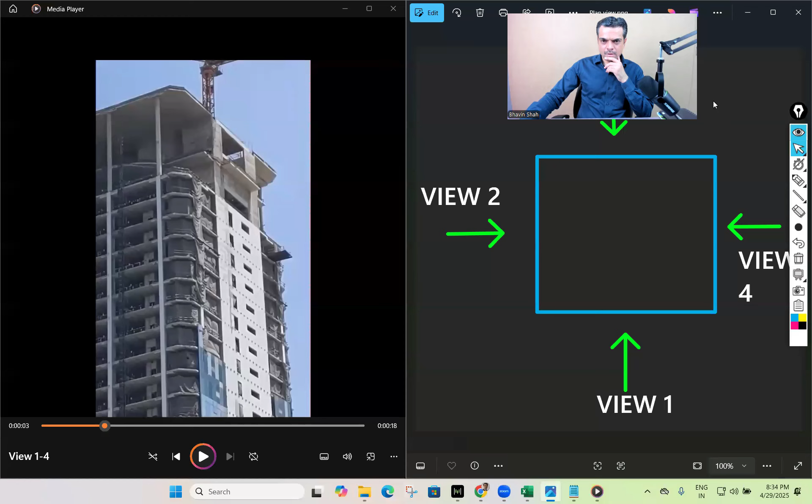Let me just open it here. Okay, this is what I have said as... so this is the view number... if I just put it here.

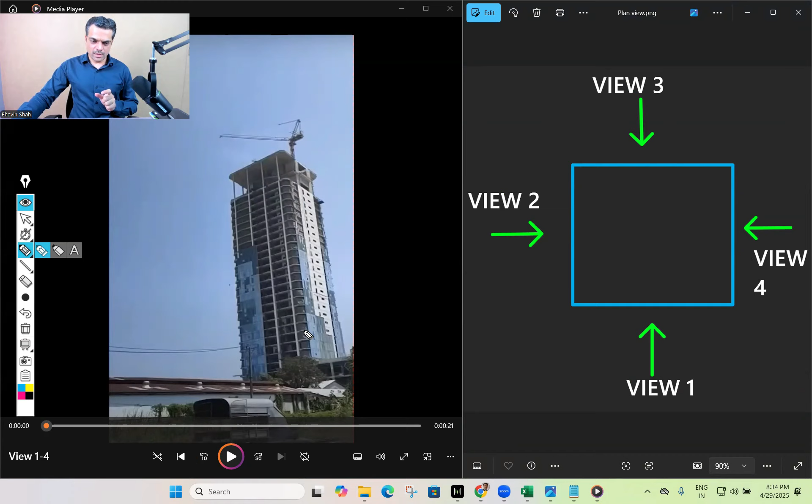Okay, so first of all this view I've considered as view 1-4. So we are looking from this direction. This is side number 1 and this is side number 4. So we are looking from this view - that is view number one and view number four, as I have said here.

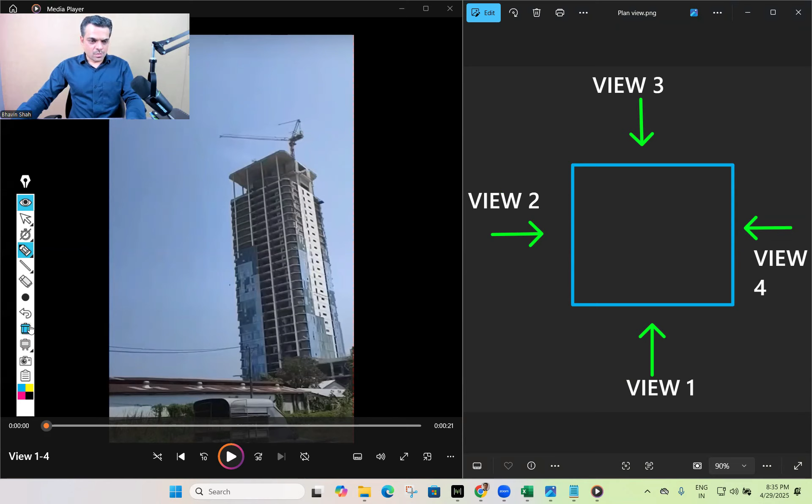So right now we'll just put up this quick clip in fast motion, or in real time motion, and of course in the next part of this session we'll run this clip in slow motion. Okay, so now it's not running - okay, here it is. So this is the view number one and four.

And from that side, here we can see some failure, and then suddenly it collapses. Of course we'll try to analyze this clip in very slow motion in the next part. So this is one of the view number one and four.

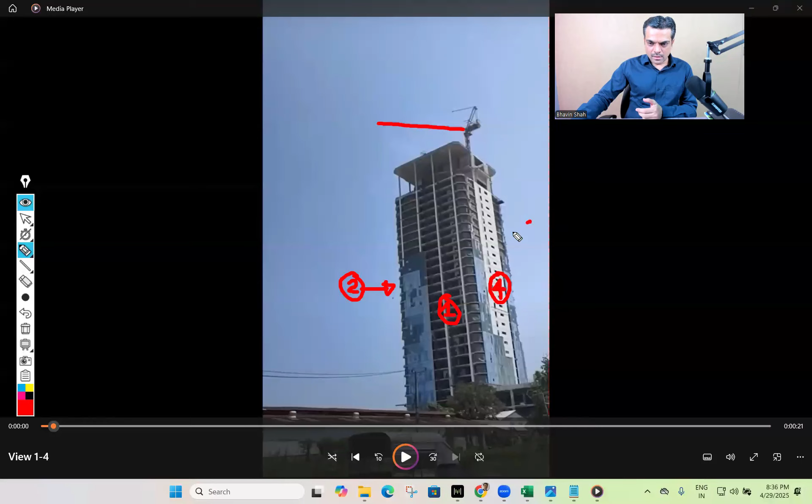Second view - let's see what is view number two. In this view, what we could see - of course the view I have defined based on my understanding, based on the limited information we have. One piece of information we have from this clip is that there is a position of the crane here, which we can see at the top. So this is side number one, as we said, this is side number four, and opposite to this is our side number two, and in the back side, this is side number three. So let's try to see view number two.

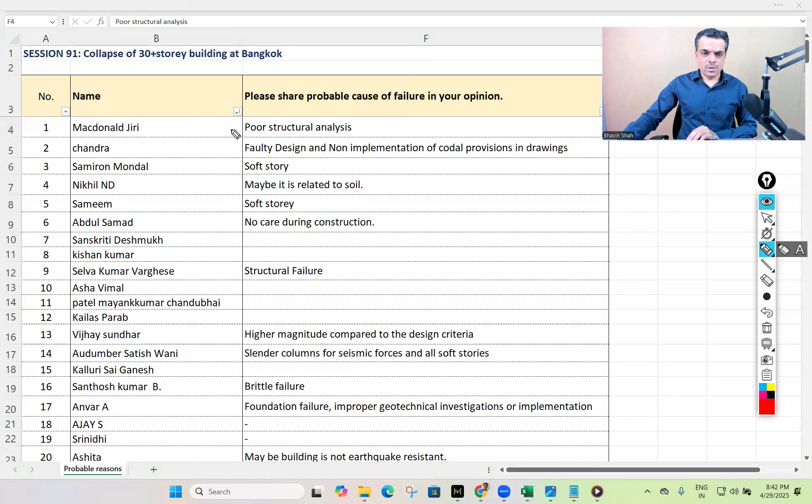Okay, great. So Macdonald is saying poor structural analysis. Chandra is saying faulty design and non-implementation of the codal provisions. Samiron is saying soft story, right? Nikhil is saying it is maybe related to soil. Sameem is saying soft story. So in fact we have received responses from different parts of India, as well as from outside India. Abdul is saying no care during construction, meaning fault in the construction.

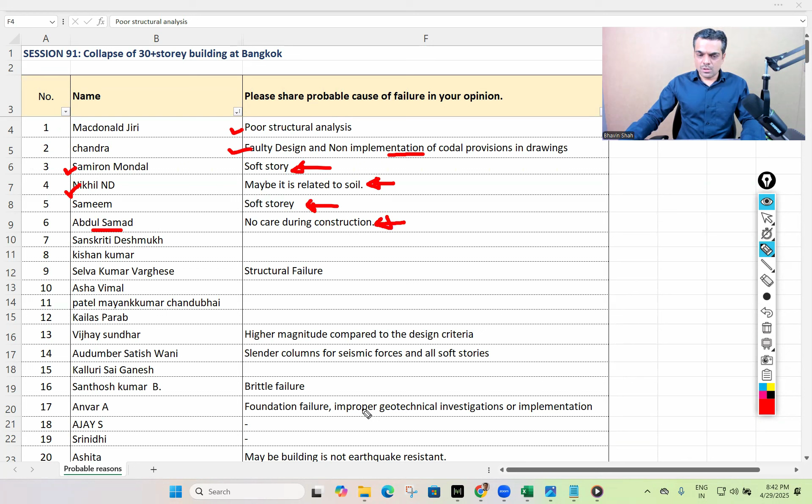Structural failure. Selva and Vijay are saying the actual load was of higher magnitude compared to the design criteria. So whatever load the structure was designed for, the actual force was higher than that.

This point is mentioned by Audumber Satish Wani: slender columns for seismic forces and soft stories. When we look at the footage, we can see that the columns are relatively slender. So that is one of the reasons.

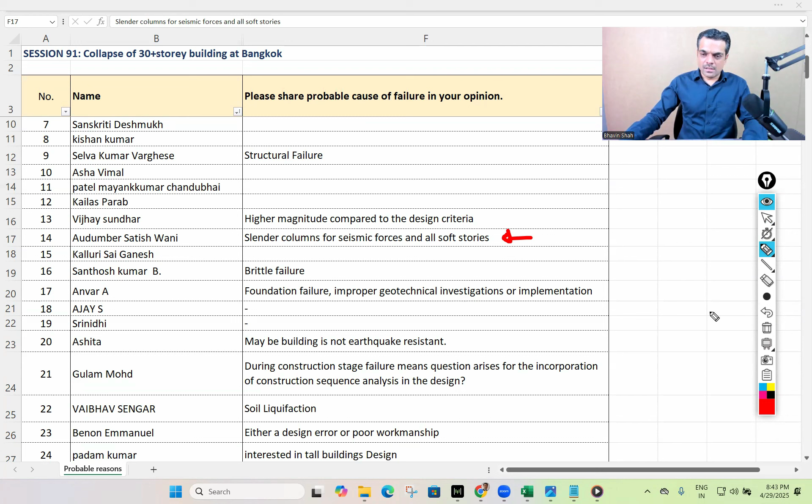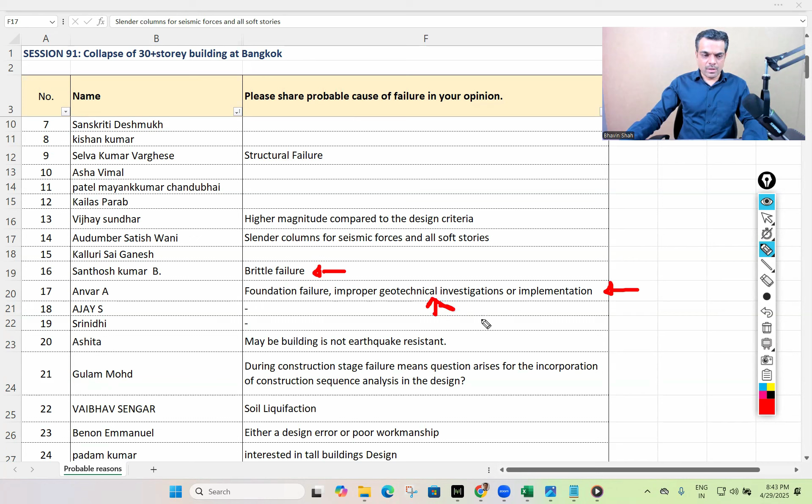Santhosh Kumar is saying it's a brittle failure. Anvar is saying foundation failure due to improper geotechnical investigation or implementation. Ashita is saying maybe the building is not earthquake resistant.

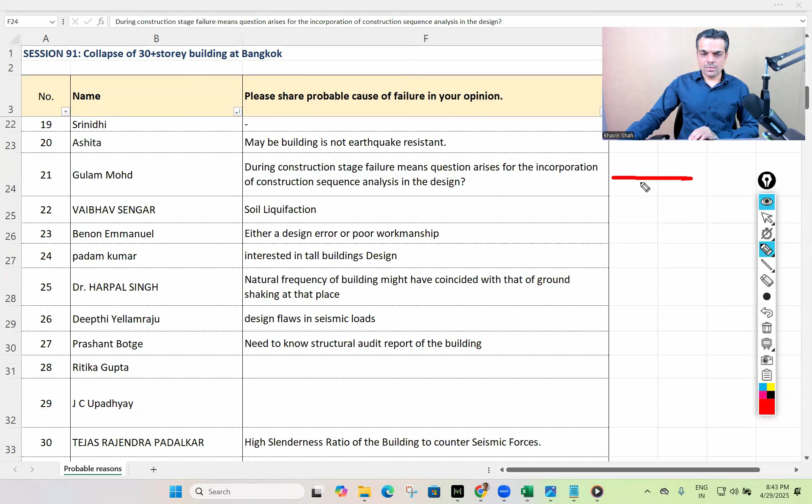Gulam is saying that failure during the construction stage raises the question of incorporating construction sequence analysis in the design. That's very important - when a building is under construction, and the structure is not yet complete, whether it is able to sustain the earthquake load.

Soil liquefaction is one of the reasons said by Vaibhav. Benon is saying either a design error or poor workmanship. Padam Kumar says he's interested in tall building design.

Dr. Harpal Singh is saying the natural frequency of the building might have coincided with the ground shaking at that place. So when the natural frequency or natural time period of the building and the earthquake shaking motion are generally nearby, the amplitude will increase, and that will increase the forces on the structure. So that's one of the reasons.

Design flaws in seismic loads. There's a need to know the structural audit report of the building.

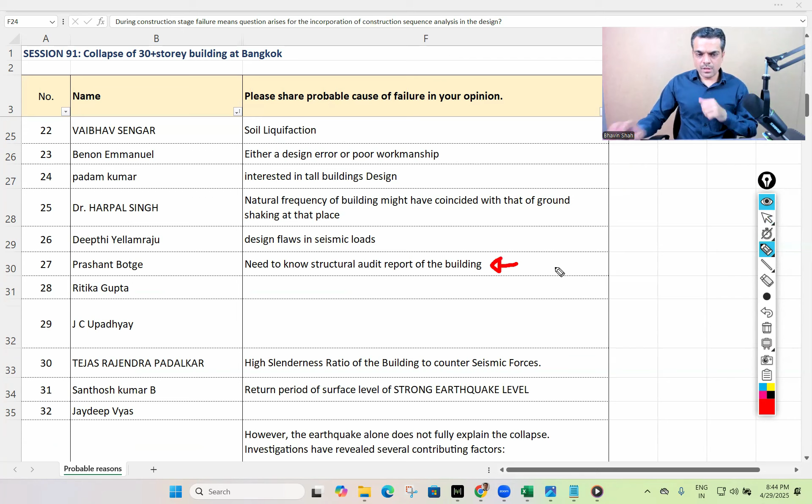Yes, of course, that's a very interesting thing. The detailed forensic investigation is under progress, and everyone is looking towards that report - what will be the finding?

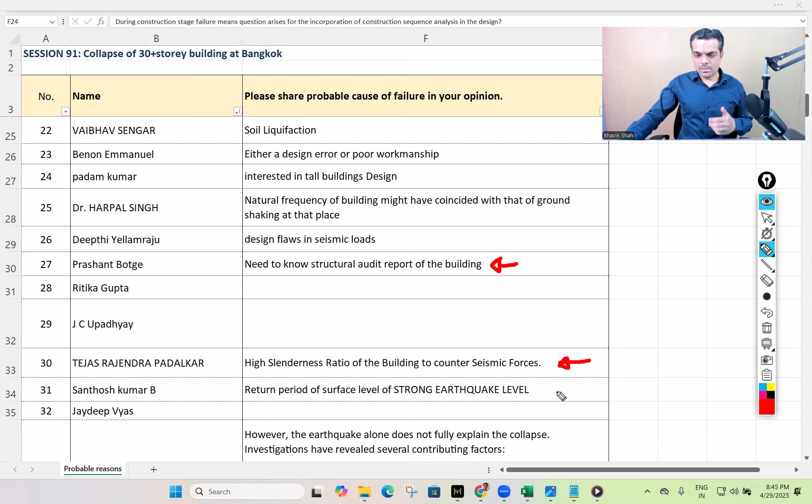Tejas is saying high slenderness ratio of the building to counter seismic forces. Santhosh Kumar is saying return period of the surface level strong earthquake level.

Sunil Varma is saying the earthquake does not fully explain the collapse. Investigations have revealed several contributing factors: structural deficiency, substandard materials, regulatory oversight failures.

So when we look at the reason for collapse of the structure, what happens is there is usually a single reason which might have triggered the collapse, and then there will be other reasons or other deficiencies of the structure which will contribute towards the collapse.

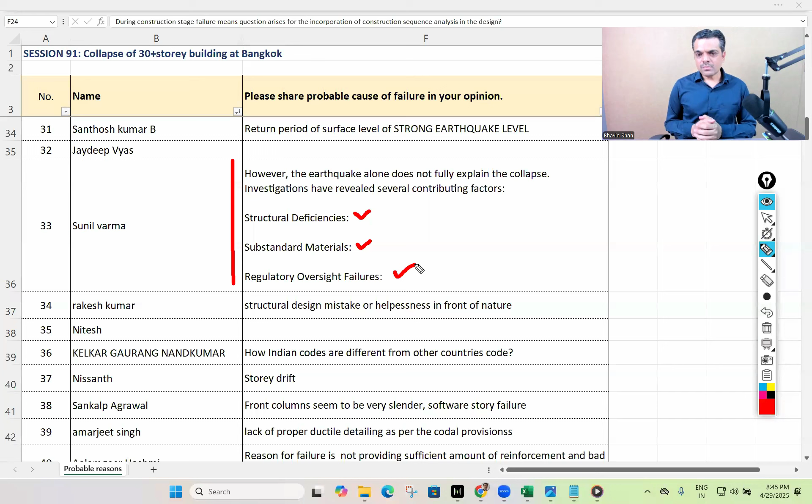Amarjeet Singh says lack of proper ductile detailing as per the codal provisions. Reason for failure is not providing sufficient reinforcement and maybe bad quality of concrete work. Anees is saying mechanical couplers and soft story. So we can see soft story is repeating at a number of places.

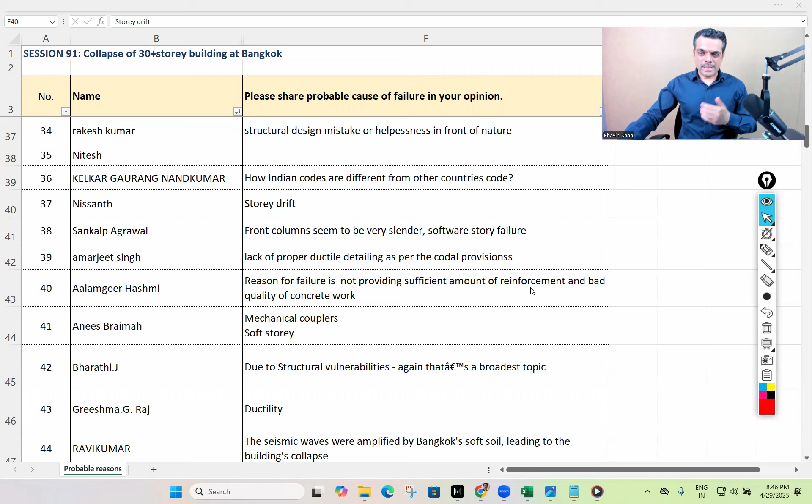Bharathi is saying it's due to structural vulnerabilities. Greeshma is saying maybe improper or inadequate ductility. Ravi Kumar is saying the seismic waves were amplified by Bangkok's soft soil, leading to the building's collapse.

So we can see 3-4 participants have said the collapse is triggered because of, or rather contributed to, the geotechnical failure, we can say.

Soft story and punching shear, that's said by Chandra Bhan. Pratik is saying most likely the slender columns and the soft story.

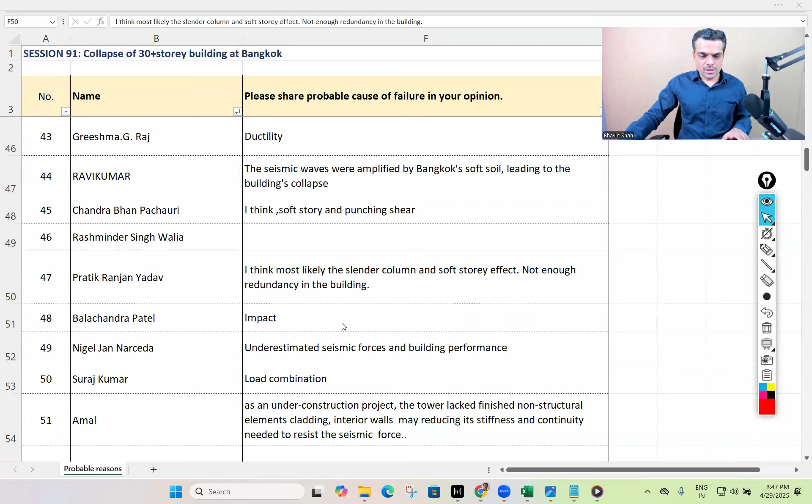Nigel is saying underestimated seismic force. Amal is saying as an under-construction project, the tower lacked finished non-structural elements like cladding and interior walls, reducing its stiffness and continuity needed to resist the seismic force.

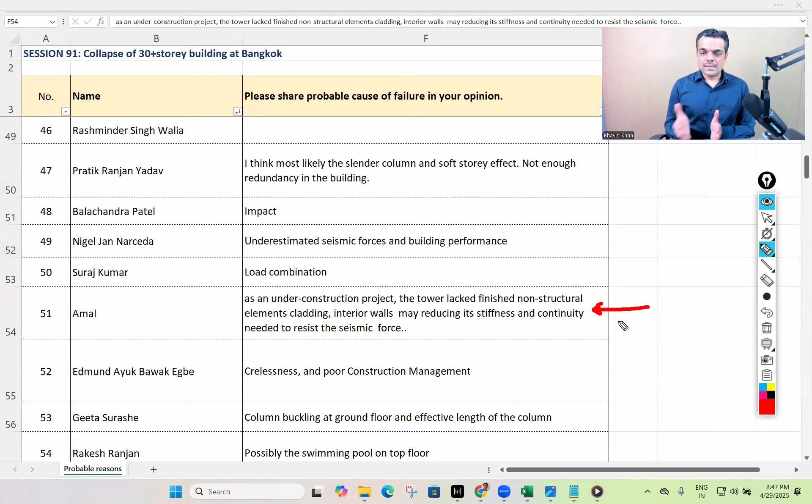Of course, we do not consider all non-structural elements for the purpose of resisting earthquake load, but definitely we can say non-structural elements also contribute towards the stiffness of the structure. So certain parts of the structural system might not have been completed in totality - that may be one reason, apart from the non-structural elements.

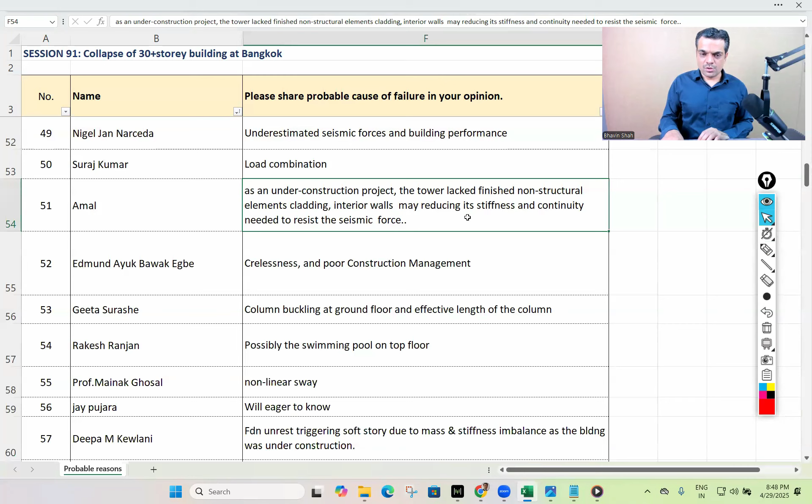Poor construction management, said by Edmund. Geeta is saying column buckling at the ground floor. We'll look into all these reasons once we get into the slow motion mode.

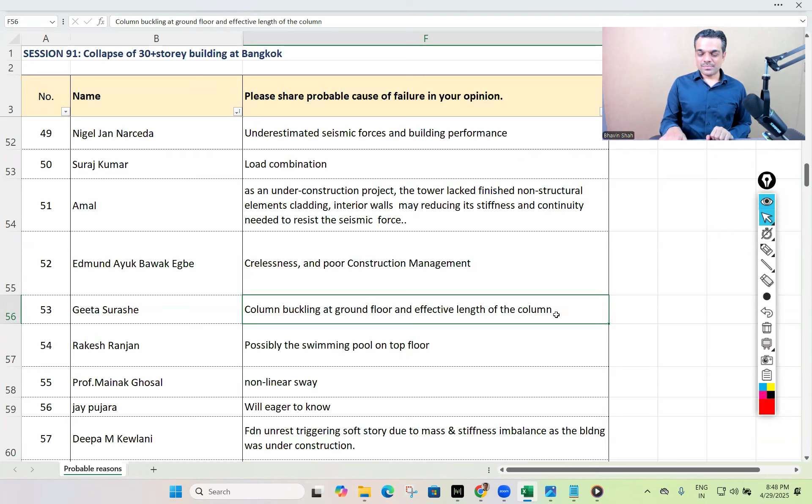Rakesh is saying possibly a swimming pool on the top floor. This was under construction. On a few other buildings, there was a swimming pool where we could see the splashing of water, but on this building, as per my information, I think there was no swimming pool because it was under construction.

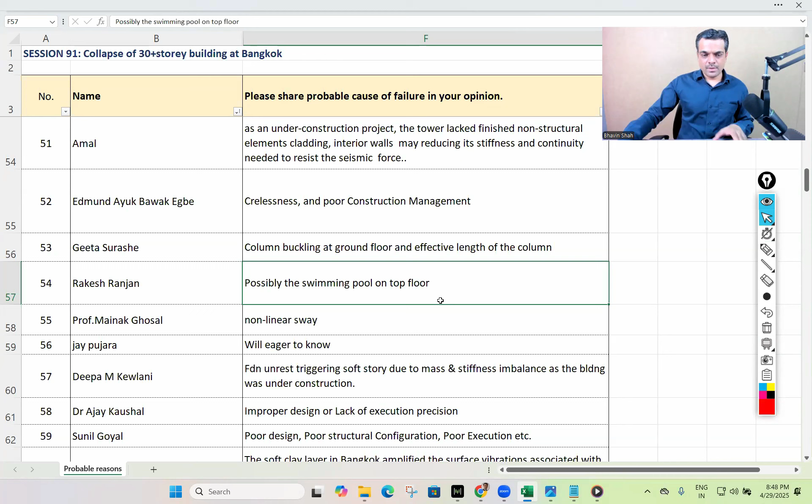Nonlinear sway, by Professor Mainak Ghosal. Jay is saying he's eager to learn this. Deepa is saying foundation.

Unrest triggered soft story due to mass and stiffness imbalance as the building was under construction. Dr. Ajay is saying improper design or lack of execution precision. Sunil Goyal is saying poor design, poor structural configuration, and poor execution, etc.

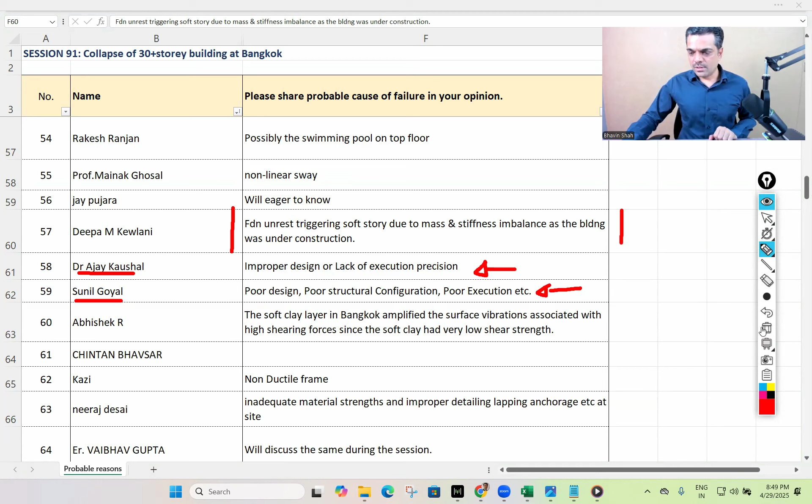Abhishek is saying that the soft clay layer in Bangkok amplified the surface vibrations associated with the high shearing forces, since the soft clay had a very low shear strength. So again, it contributed to soil failure.

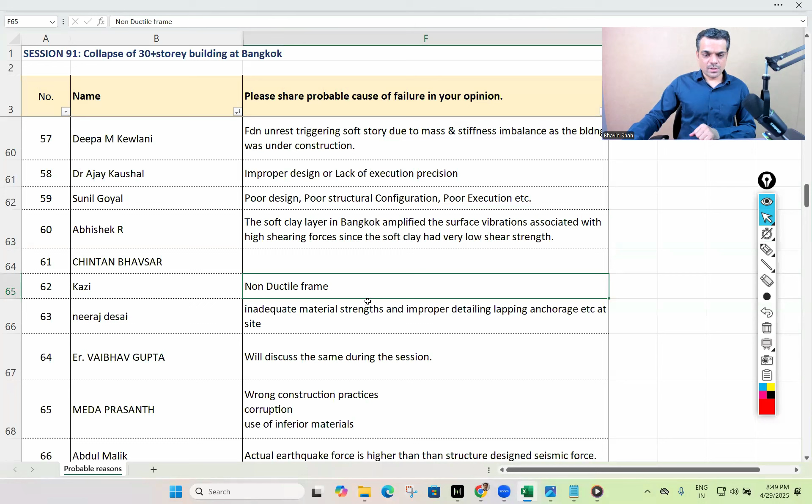Kazi says non-ductile frame. Neeraj is saying inadequate material strength, improper detailing, lapping, anchorage - so ductile versus non-ductile detailing. Meda is saying wrong construction practices. Abdul Malik is saying that the actual earthquake force may be higher than the design earthquake force.

Prasad is saying that collapse of some of the very weak members leads to entire collapse in the form of progressive failures.

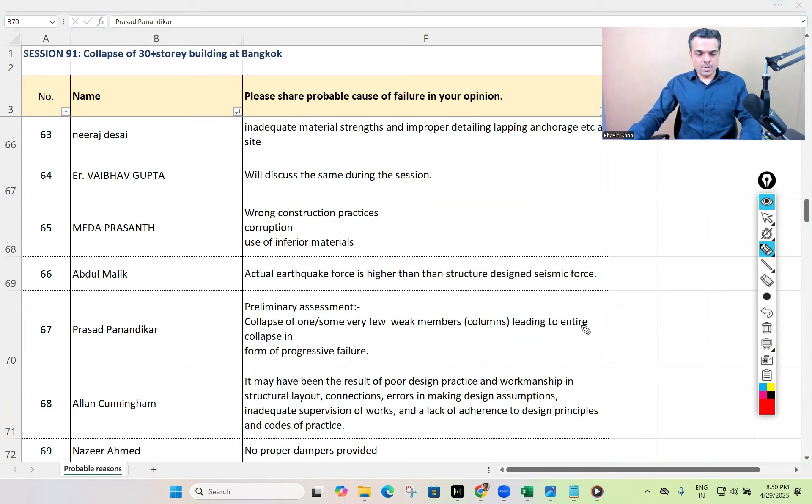Allan is saying that it may have been the result of poor practice, workmanship in structural layout connections, error in making design assumptions, inadequate supervision of work, and a lack of adherence to the design principles and codes of practice.

So that's what we were just discussing, that there may be multiple reasons contributing to the failure of the structure. In fact, I was involved in the forensic investigation of a few projects. We had to find out which is the trigger point that actually triggered the collapse, and then there will be multiple factors contributing towards the complete collapse or failure of the structure.

Nazeer is saying no dampers were provided.

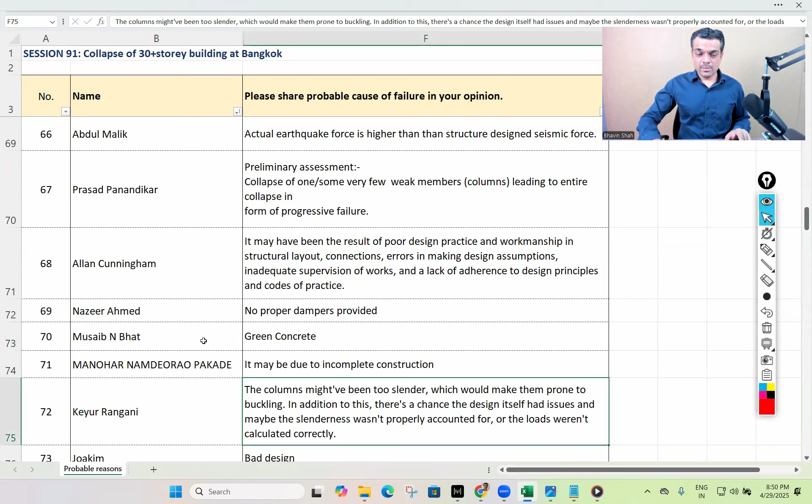Musaib is saying green concrete - that means the concrete might not have achieved its full strength, that's what I understand. It may be due to incomplete construction, Manohar says. So this all we have touched upon.

Keyur is saying that the column might have been too slender, which would make them prone to buckling. In addition, there's a chance the design itself had issues, and maybe the slenderness wasn't properly accounted for, or the loads weren't calculated correctly.

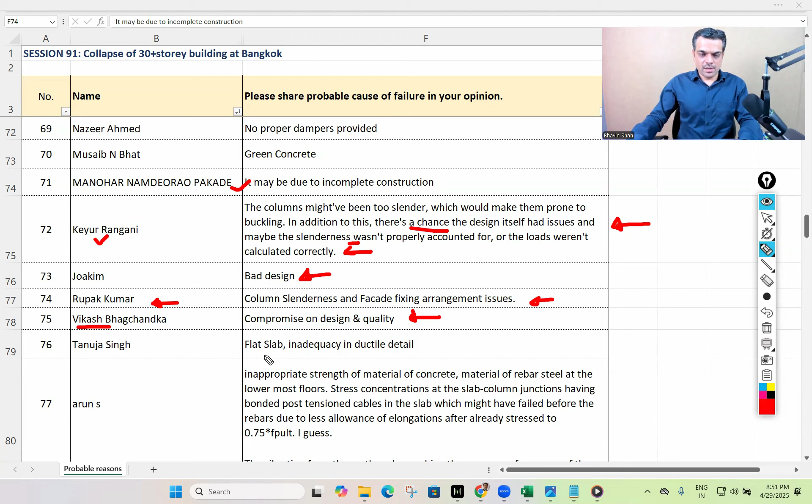Joakim says it's a design fault. Rupak Kumar is saying column slenderness, facade fixing arrangement issues - so this is something new. Vikash is saying compromise on design and quality. Tanuja is saying flat slab, inadequacy in ductile detailing.

Arun has made a very interesting point here: it may be inappropriate strength of material of concrete or rebar steel at the lowermost floors, stress concentrations at the slab-column junctions having bonded post-tension cables in the slab, which might have failed before the rebars due to less allowance of elongation after being already stressed to 0.75 times fpult. So that's the case, right?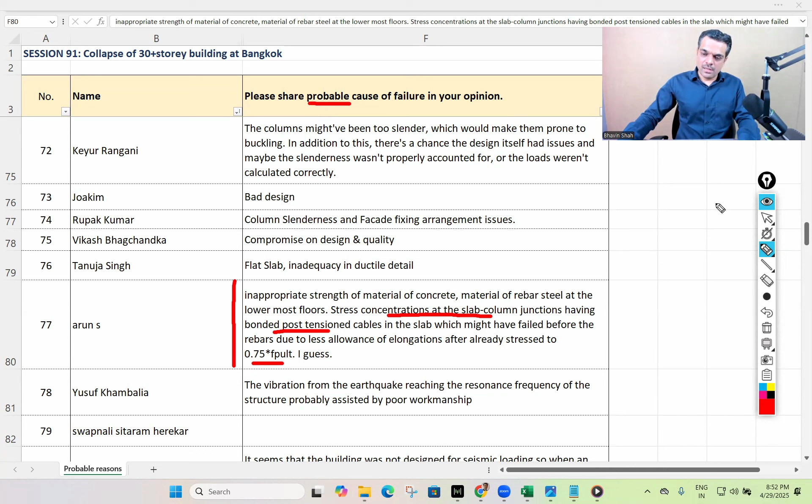In fact, whatever reasons we are putting right now here, these are all guesswork. It's just probable failure causes that we're writing. It's not perfect - everyone is making a guess right now.

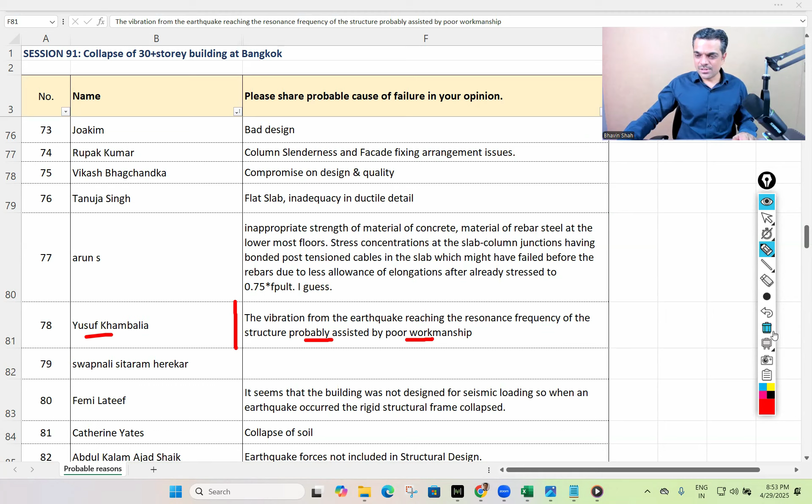Okay, Yusuf is saying that the vibration of the earthquake reaching the resonance frequency of the structure, probably assisted by poor workmanship. So the natural time period and the average time period of the ground motion were both nearby, that's what he's trying to say, and then the poor workmanship assisted this failure of the structure.

Femi is saying it seems that the building was not designed for seismic loading, so when the earthquake occurred, the rigid structure frame collapsed. So it was a kind of rigid failure, right? We could not say the big building was completely swaying like this - it's a rigid failure. Catherine says it's a collapse of soil.

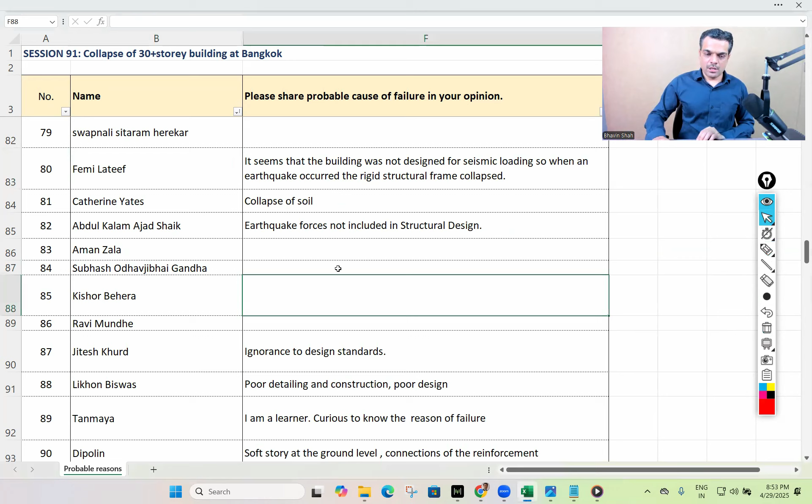Abdul Kalam is saying that earthquake forces might not have been considered in the structural design. Ignorance of design standards, Jitesh says. Likhon says poor detailing and construction, poor design.

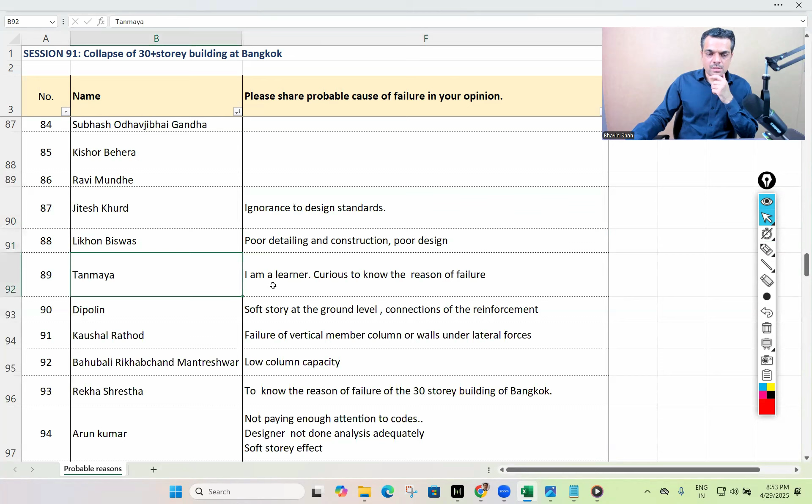Tanmaya says wants to learn - that's good. Dipolin says soft story at the ground level, and connections of the reinforcement. Kaushal says failure of vertical member columns or walls under the lateral loads.

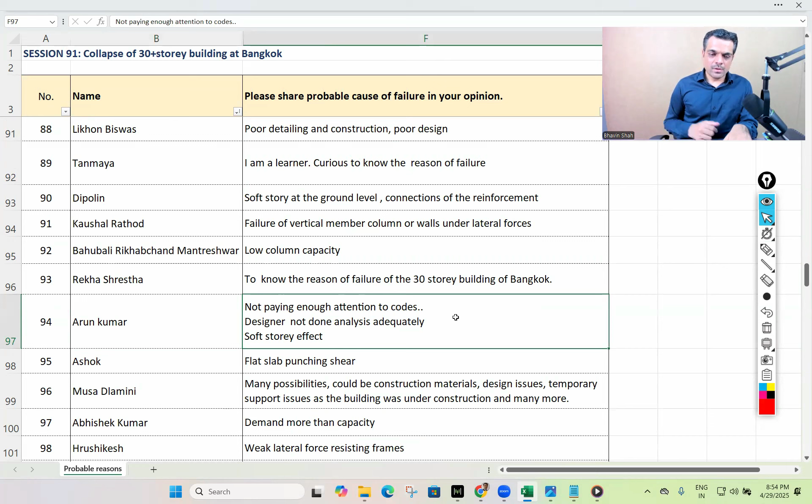Bahubali is saying low column capacity. Rekha Shrestha says she wants to know the reason. Arun Kumar says not paying enough attention to codes, the designer not doing analysis adequately, and the soft story effect.

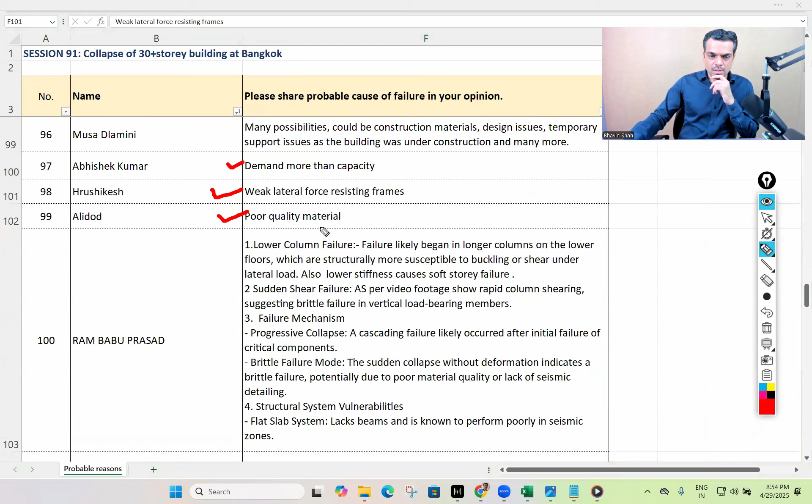Demand more than capacity, Abhishek says. Hrushikesh says weak lateral force resisting frames. Alidod says poor quality material. Rambabu Prasad makes multiple points here.

Okay, so first of all, there is a lower column failure. We'll try to analyze everything with slow motion videos after this. It says failure likely began in the longer columns on the lower floors, which are structurally more susceptible to buckling or shear under lateral load, and also lower stiffness causes soft story failure.

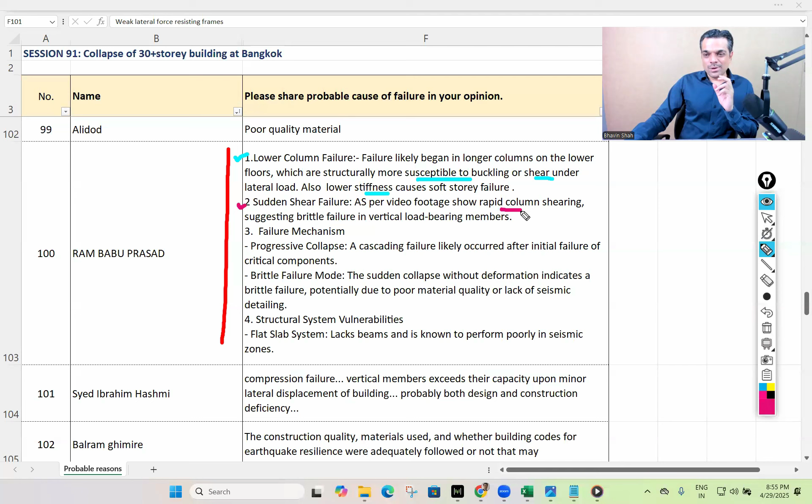Then there is a sudden shear failure. As per the video footage, it shows rapid column shearing. We'll show this, you must have seen it, but we'll try to see it again. And there are some interesting things I've collated which we'll discuss once we finish this file.

So column shearing is, of course, quite evident in the video footage, suggesting a brittle failure in the vertical load-bearing members. And finally, there is a failure mechanism - progressive collapse. A cascading failure likely occurred after initial failure of critical components. Brittle failure mode is a sudden collapse without warning. And structural system vulnerability - there is a flat slab system used, so lack of beams, and it is known that flat slab systems generally perform poorly in earthquake events.

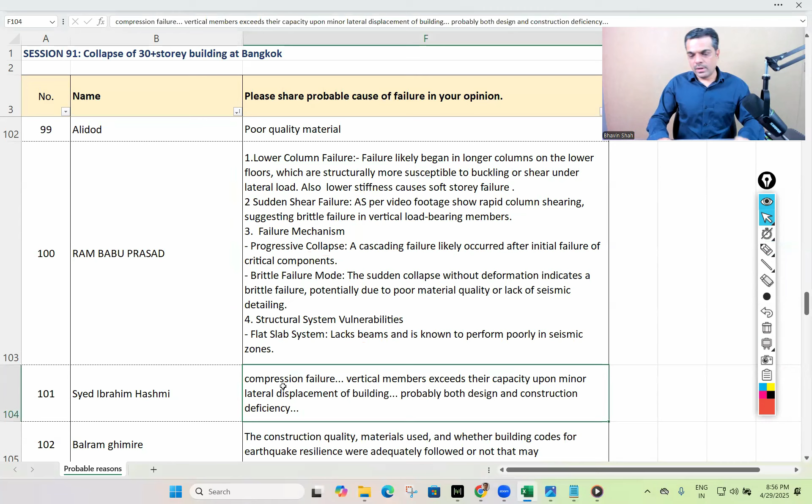Okay, Syed has said compression failure, vertical member exceeds capacity, so it's a column failure. Balram says the construction quality and materials used, whether building codes were adequately followed or not, that could be the reason. As Guru Kiran says, soft story - maybe strong beam weak column was not considered, so basically ductile detailing was not done.

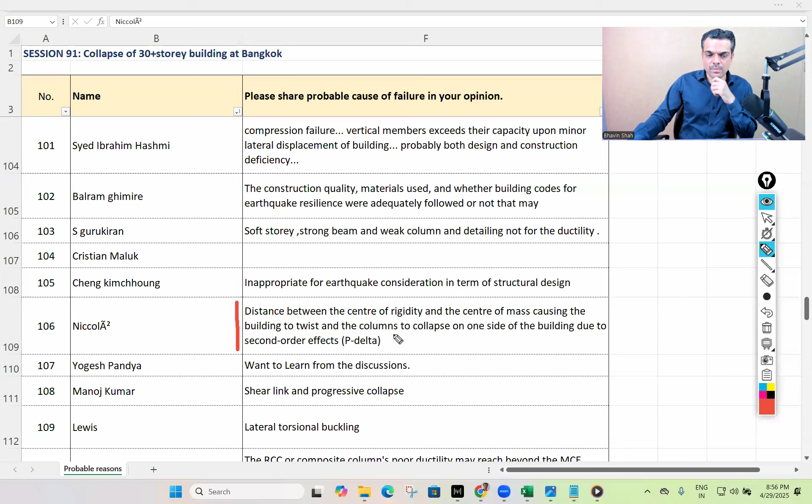That's the point made here, along with soft story. Inappropriate earthquake consideration in terms of structural design - that's what Cheng is saying. Nicola is saying the distance between the center of rigidity and center of mass caused the building to twist, and the columns to collapse on one side of the building due to second order effects.

Very interesting thing - it's said the whole building twisted. So maybe we can say the first mode is the torsional mode. During the seismic event, the building twisted, and that triggered the collapse on one side of the building due to second order effects, right?

Yogesh Pandya says okay, wants to learn - great, that's great. Manoj Kumar says shear link and progressive collapse.

Okay, Lewis is saying lateral torsional buckling. I think he's also pointing to the same torsional mode, probably.

Suresh Kumar is saying that the RCC or composite columns, poor ductility, may reach beyond the maximum considered earthquake level, and unfortunately no other buildings had this impact. Yeah, that's right - so it's only this building which had this catastrophic impact, or we can say it collapsed completely.

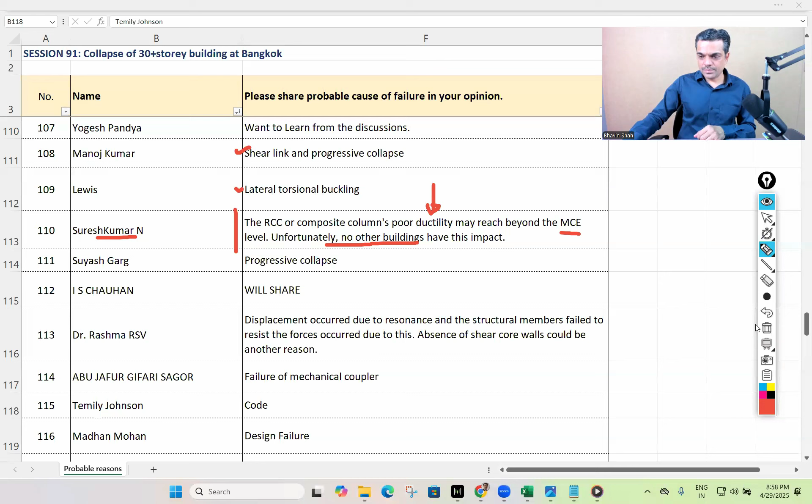Okay, Suyash Garg saying progressive collapse. Yes, Chauhan can share the details if he is online.

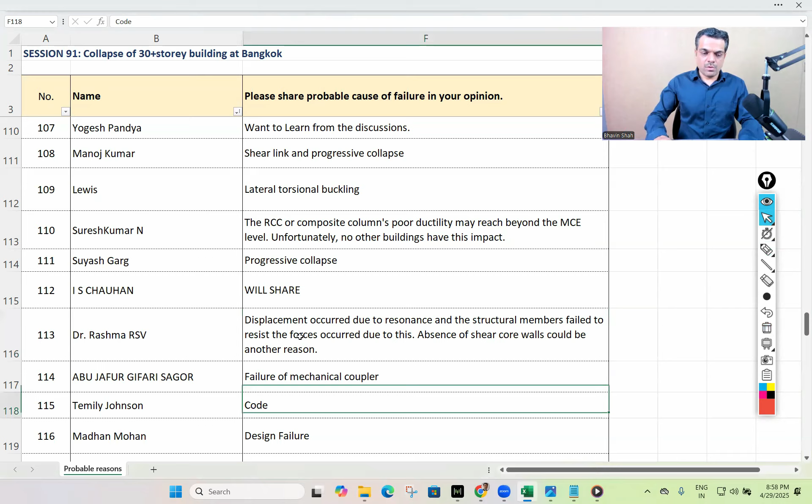Dr. Rashma says displacement occurred due to resonance and the structural members failed to resist the forces occurred due to this, and absence of shear core walls could be another reason. Right, okay, so there is one more reason coming up, which is failure of mechanical coupler.

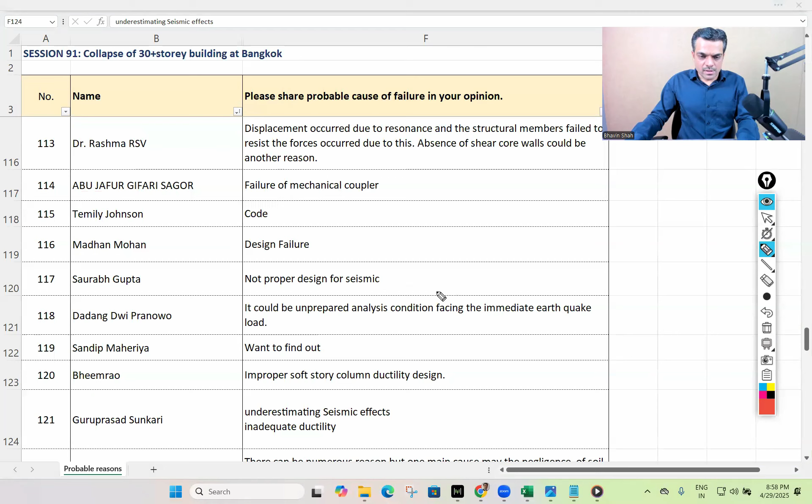Abu Jafar says - Temily says maybe codal provisions might not have been followed, that's what I understand from this single word. Madhan Mohan says design failure. Saurabh says not proper design for seismic, so adequate design might not have been done for earthquake resistant design.

Okay, Dadang says it could be unprepared analysis condition facing the immediate earthquake load. Yeah, possible.

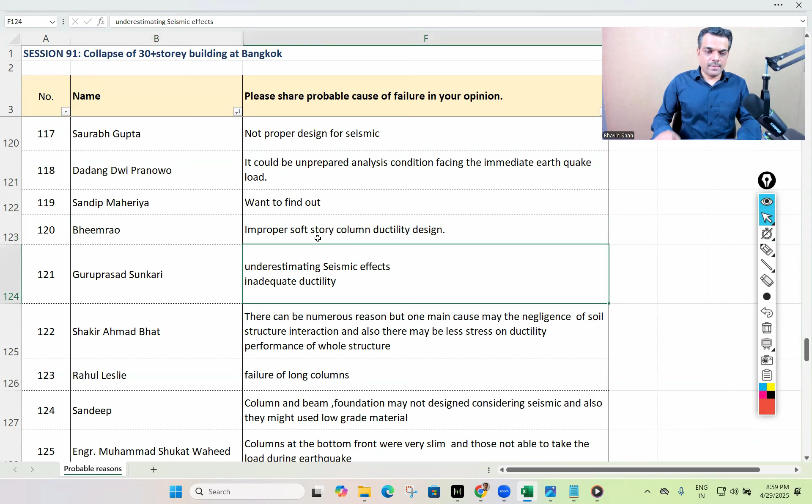Okay, Bhim Rao says improper soft story column ductility design. Guru Prasad says underestimating seismic effects. Shakir says there can be numerous reasons, but one main cause may be negligence of soil-structure interaction, and also there may be less stress on the ductility performance of the whole structure.

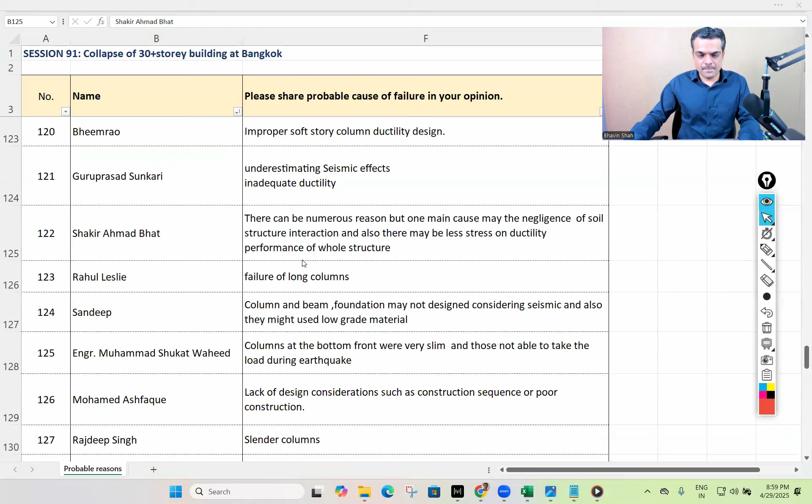Failure of long columns, Rahul says. Sandeep says column and beam foundation might not have been designed considering seismic, and also they might have used low grade material. Mohammed says the columns at the bottom front look very slim, and those may not be able to take the load, and that might have triggered the collapse. Mohammed also says lack of design considerations such as construction sequence or poor construction.

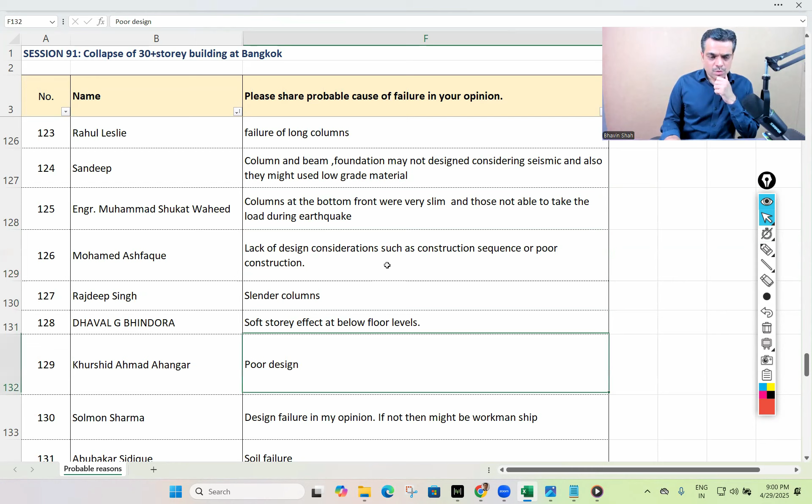Rajdeep says slender columns. Dhaval says soft story - we can see now the pointers are repeating. Design failure, okay. Soil failure, Abubakar is saying. Uncontrolled vibration. Prakash is saying the inner core is a floated type due to parking arrangement, below that core - same system known as transfer floor in India's various mega cities.

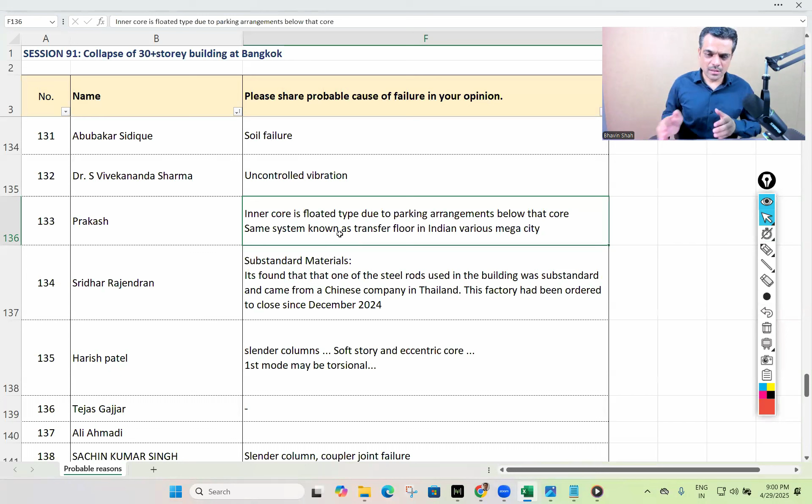Yeah, I think it's trying to say the inner core was a floated type, maybe due to parking arrangement, and that might have triggered this collapse.

Sridhar says substandard material - so it is found that one of the steel rods used in the building was substandard and came from a Chinese company in Thailand. This factory had been ordered to close since December 2024.

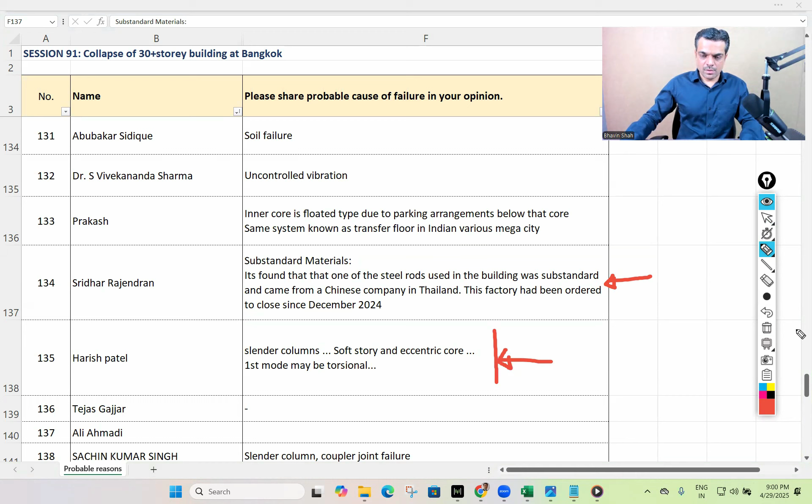Harish Patel is saying slender columns, soft story, and eccentric core. And first mode could be torsional mode, yes.

Slender column and coupler joint failure, based on Sachin. Wasib says that from his perspective, the collapse likely stems from two key issues.

First, the building was sitting on very soft alluvial soil, so basically it's a geotechnical failure. That's the first issue. Secondly, there are strong indicators that the seismic isolation system, such as base isolators or dampers, were not there. Of course, a thorough forensic investigation will be needed to confirm the exact sequence of events.

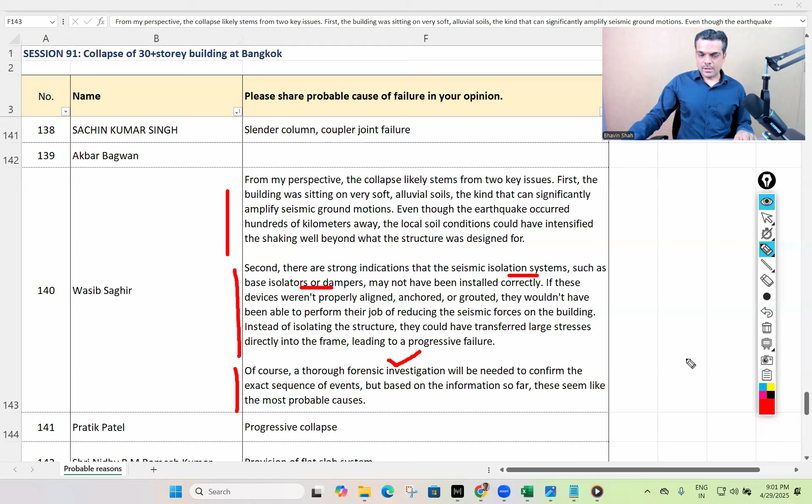Absolutely right. Okay, it's progressive collapse, Pratik says. Nidhi says the provision of flat slab system could have been the reason, buckling of the columns. Priyanshu says soft story. Aishwarya says the splashing of water in the pool at the top may have caused extra force in the structure.

According to me, I think water was not there in this building, as far as my information goes. Virang says slender column, coupler failure, punching shear failure, and the frequency of the building might have matched with the earthquake.

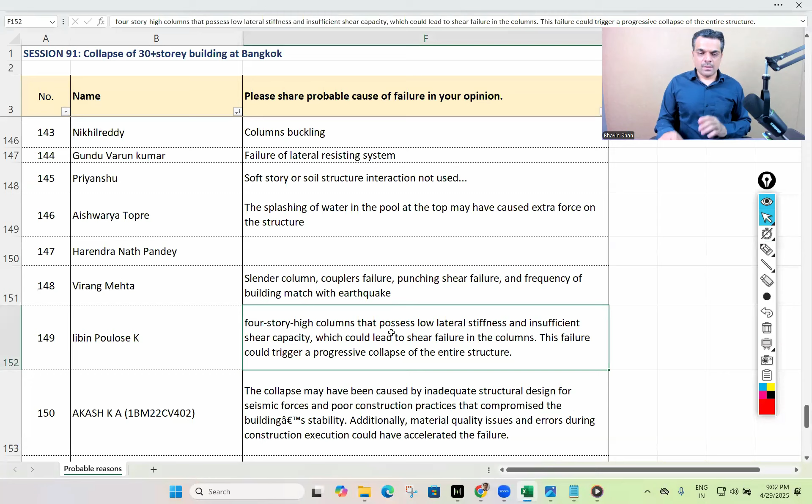Libin says four-story high columns that possess low lateral stiffness and insufficient shear capacity, which could lead to shear failure in the columns, and this failure could trigger a progressive collapse of the entire structure. Yeah, absolutely right. So column is a very vital element in the structure. If even one column gives away, the entire building will collapse.

The collapse may have been caused by inadequate structural design for seismic forces, and poor construction practices that compromised the building's stability, and material quality issues also may be there.

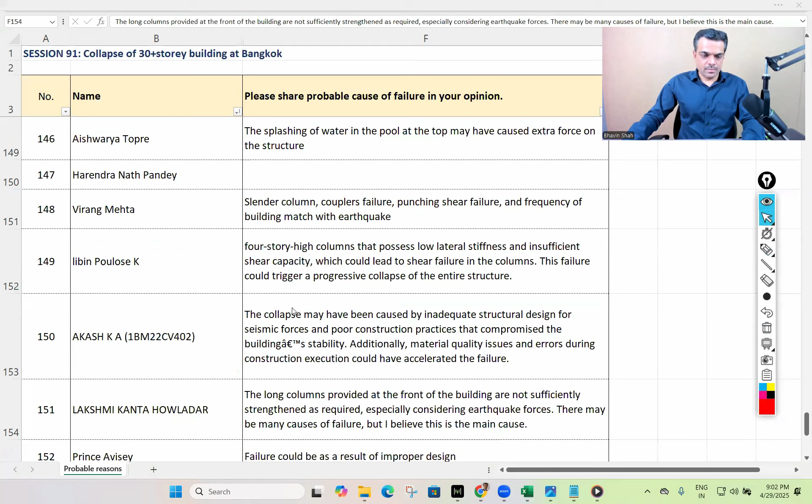That's what Akash says. Okay, Lakshmi says that the long columns provided at the front of the building are not sufficiently strengthened as required, and that columns could have given away, and that might have triggered the progressive collapse.

Prince says the failure could be a result of improper design. Yogita says forces were far higher than what was designed for. Govind says structural analysis. Prabina says she believes this is due to a problem with structural integrity and a lack of structural evaluation prior to approval by various authorities.

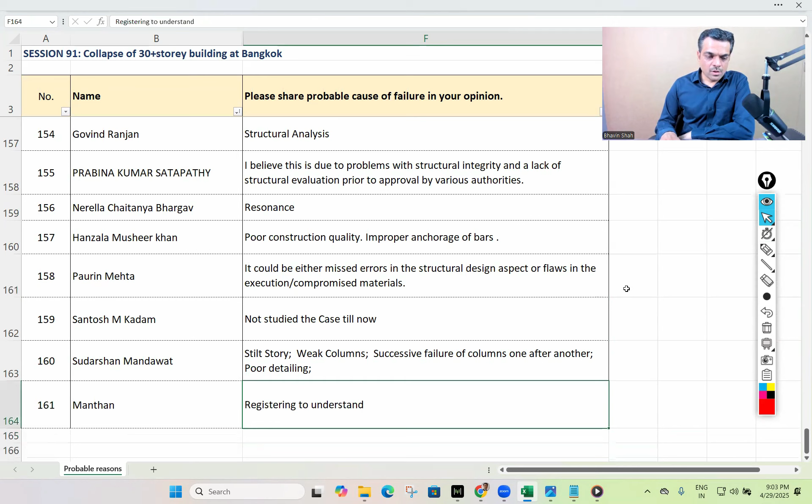Nerella says resonance. Hanzala says poor construction quality, improper anchorage of bars. Paurin says it could be either missed errors in the structural design aspect, flaws, or in the execution, compromised materials. Santosh says not studied, no problem. Sudarshan says stilt story, weak columns, and successive failure of columns, one after another.

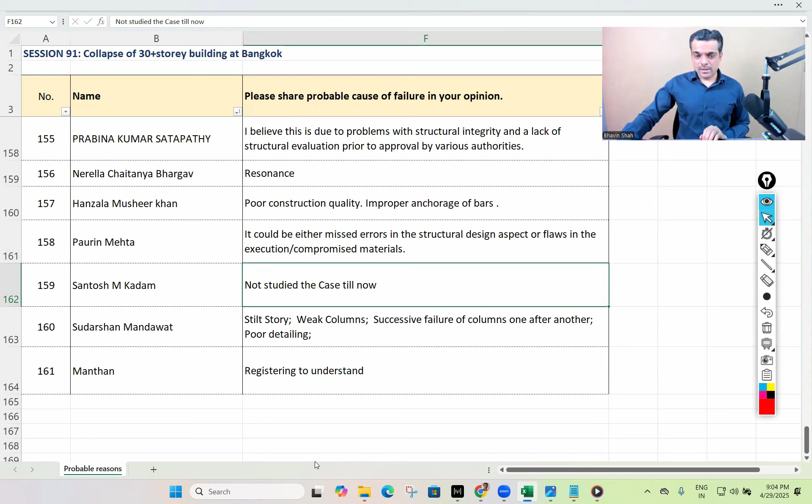So this is the information which we have received through the registration form, and I would like to thank each one of you for putting up your understanding about the failure of the structure. Of course, as far as the detailed forensic investigation is concerned, only that can reveal the exact reason. But I think this is a good source of learning for the structural engineering community, and I appreciate all the input shared here.

I think each reason is definitely vital and could be a failure trigger for this structure, right?

Now let's try to analyze these short clips, whatever we have, in very slow motion, and let's try to identify a few interesting things from this, right?

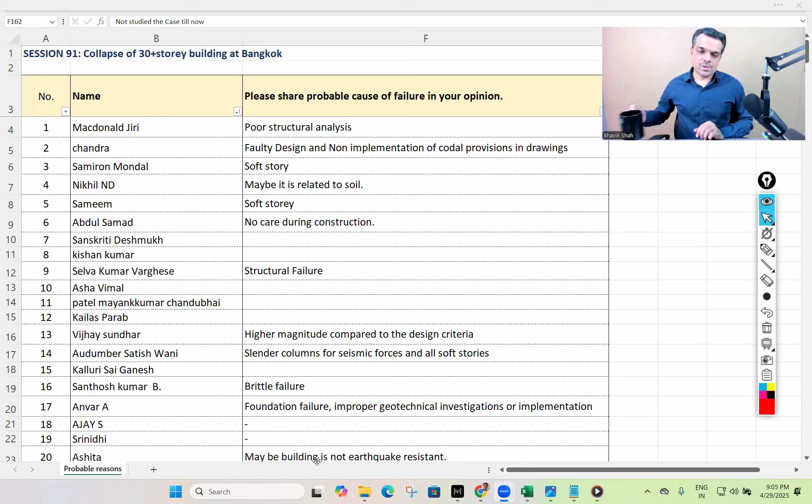Chauhan is saying that the way it collapsed, there's maximum possibility the collapse was triggered from the foundation level, maybe due to punching or tilting.

Neeraj Singh is saying maybe it was due to repeating earthquake and higher intensity. Okay, so let's try to put up this.

Now, these same clips, I have tried to put into very slow motion. So again, let us start with view number 1 and 4. We're looking at the building from view 1 to 4, the same building. Now the building is intact up to this point.

Now just observe on this side. So this is the side we can see. Okay, now here we can see the failure is initiated on this part.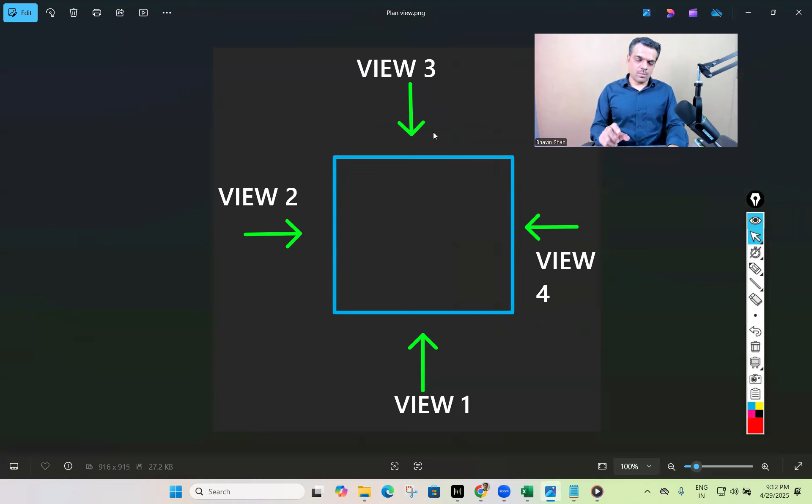So in view number 3, we have two clips. In fact, one is at the bottom of the ground and other is at the top. As you can see, there are two clips. And again, I'll keep mentioning this disclaimer that all views are written based on my understanding, after looking at these clips several times, so my understanding may not be correct. So now what we're looking at is view number 3, and this is from the top portion.

Now let's move this clip in a shorter way, or frame by frame. Now here we can see, if we focus on this point, you'll be able to see that this portion is coming down. This portion, right? This portion is coming down. If we go 2-3 frames ahead, we can see this entire crane also, if you focus on it, is coming down.

If we just start again, so if we just go a couple of frames back, so here also we can see, when we look at the structure from view number 3, that something has occurred in this portion. Right, and then we can see this portion is going down. The crane itself, which is supported on or near this shear wall, we can see this entire portion is going down, and that has created stresses into this portion of the beam and slab junction.

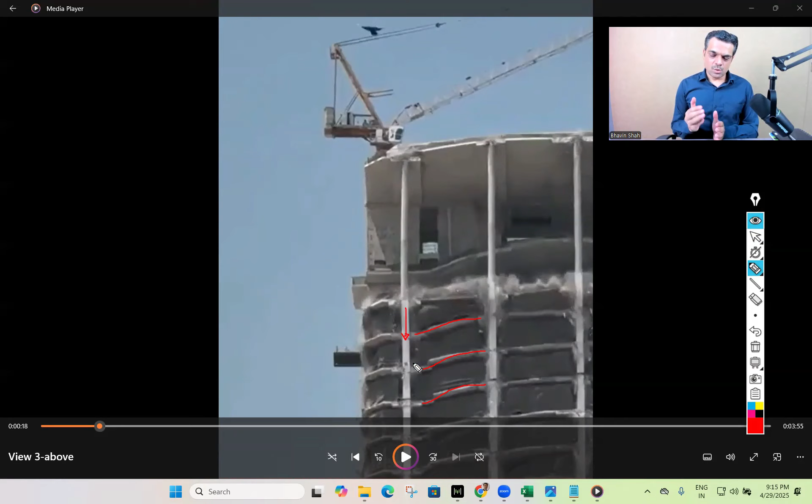So earlier it was in the straight line. What does it mean that this column has given away? Now this column has failed. If you remember in view number 3, that's what I'm considering. We are looking at the structure from the top side. Now we'll be looking at the structure from the bottom side. This clip you must have seen a number of times, wherein this column fails first, and then this column gives away. Just observe what happens after a few more frames.

This line is inclined, right? This entire slab has become inclined because this column has given away, but this column is intact. After a few seconds, if we move further...

See, this connection itself is gone. And then because of gravity, once both columns have given away, this will come nearly into a straight line. Just observe this slab. It is coming nearly into a straight line because now both columns have given away. So see here, now it is coming into almost a straight line, even though it has collapsed, because both columns have given away and now it is coming down directly, let's say, under the effect of gravity. So then there is a complete collapse.

Now this is a classical footage, and this footage you must have seen a number of times. So this also, let's try to play at a shorter scale. So when this clip was taken, we can see that people are running out.

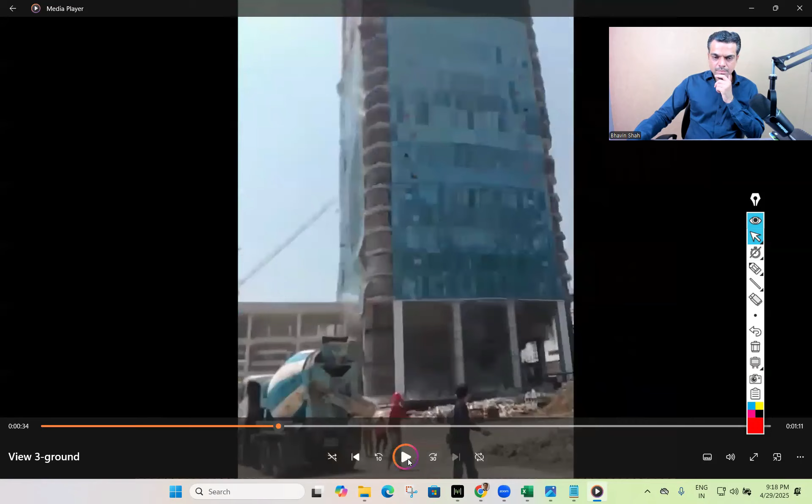So this is the point where we could see here, there is a failure of this column. This column has given away. But what happens before the failure of this column? Now, if we just go back, let's try to analyze it again.

So when this column has given away, and if you see a few earlier frames, this is what my understanding is when I was looking at this clip closely, this is what I found. As per my understanding, what I could see here is that this column, or this portion, has started sinking.

If you see this portion, this is actually supported on this column, or maybe there could be a shear wall inside, right? So if we just go back to the previous frames, we can see that this is completely straight, right? This portion is almost straight, we can see. Even this line, this black colored line, also looks almost straight.

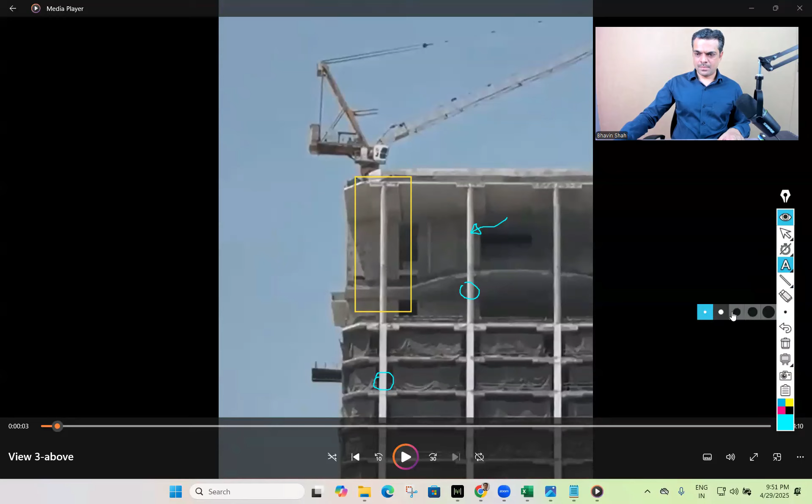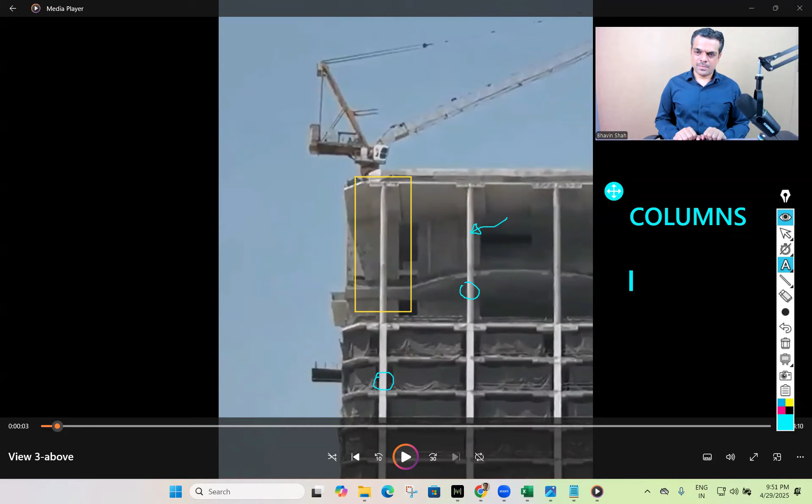But what about the columns? What about the seismic form? I think we should also speak about form, because you see the column is thick, and when the shake comes from the seismic part, it's not an irregular form, it's a regular form, but it's not quite right. Our colleague before mentioned another building with a swimming pool - it was normal shaking, in the X direction and Y direction, but here it was not in a really nice direction. That's the first part. The second part: Mr. Alan shared some link on YouTube, and I think it would be better if someone among our participants has real protocol or real documents, because on the internet there could be fake photos or fake news. If our colleagues have real documents from the government of this country, or from our colleagues, it would be nice.

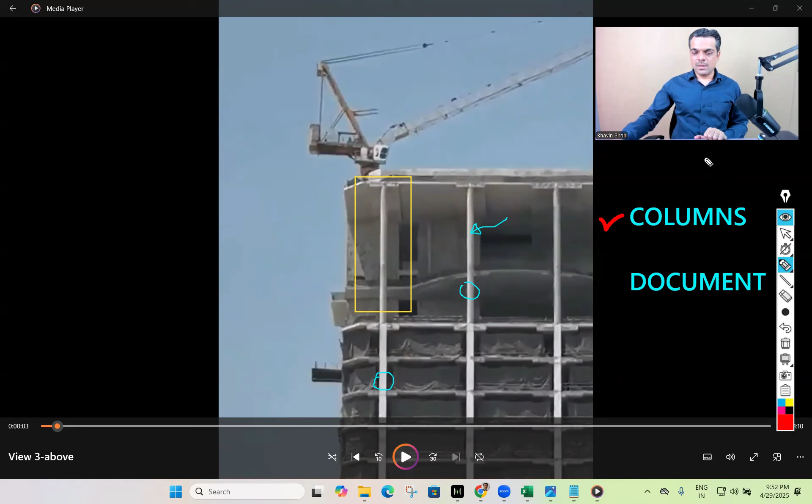Absolutely right, thank you, you made a very important point about the columns. That's why in earthquake resistant design, the entire thrust is on the sizes of the column - we want columns as strong as possible so they don't become a weak link. Unfortunately, in this building we can see the buildings are relatively very slender, which was mentioned by many participants in the registration form also. If the building is slender, there is a possibility of a column becoming a weak link, and once at least one column fails, we can see from this example that the entire structure will collapse.

Secondly, yes, we must wait for the official documents when they are released, and we will definitely have one more discussion once we get more information on this.

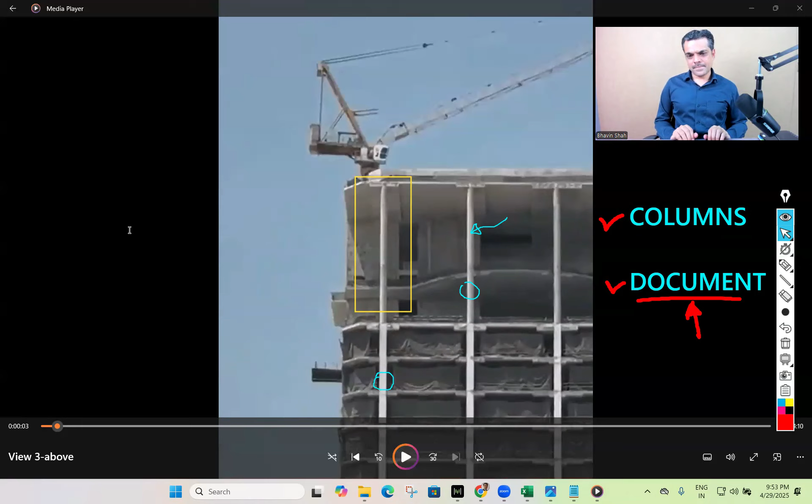Good evening, sir. Just for curiosity, I want to know what are the steps and methods used for detailed forensic investigations?

Okay, forensic investigation, let's say if we talk about at least in India. I worked on a few projects, and I would say it's not very well organized in India. But let's say, just to answer your point, what are the steps involved? The first step, let's say where I was involved, and then how we did it. First of all, we try to see how the structure failed.

So when we went to the site, at that time we didn't have this technology of CCTV camera capturing images and video. So what we had was only the debris of the structure spread around the site. We went to the site, plotted it, and tried to visualize by making certain drawings and animations how the structure could have collapsed, how it would have failed. That's the first thing we did in the forensic investigation.

Secondly, we take samples of materials like concrete, steel, etc. from those debris, and those are tested.

Then the third thing is the study of the structural analysis drawings, details, calculations, structural design basis, geotechnical investigation report. Based on the failure mechanism observed by plotting, by creating a 3D model, we also performed a few advanced models, maybe non-linear analysis models, buckling analysis, etc., to replicate the failure mechanism or the failure pattern, the way the building has collapsed.

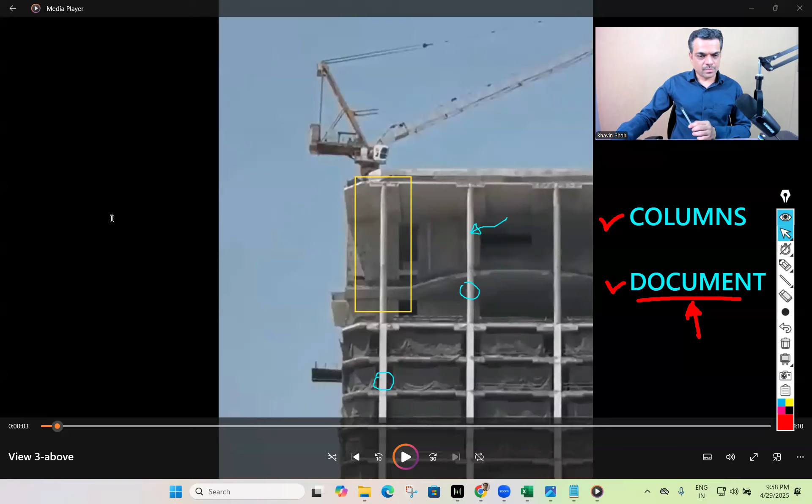I was literally shocked to see the column dimensions at the ground floor. The structure failed in gravity, let alone wind and seismic loads. Yes, absolutely right.

ASCE guidelines for forensic engineering practice, second edition, are helpful. The Forensic Structural Engineering Handbook and Robert Ratay's guidelines, and the approaches stated by Bhavin Shah. Thank you.

Antidote is asking: Mr. Alan, do you have some documentation or protocol about this building? It would be helpful.

Harris is saying the beams are of very small depth, so the system is like a flat slab and core with perimeter columns. In my view, under heavy shaking, the flat slab-column connection gives way.

Harris is saying that in the slow motion video, columns were okay, but slabs were coming down first. Yes, definitely, the slabs were coming down first, and those slabs are connected to the other side of the column. My assumption is that column settled down, or that portion of the shear wall started settling down.

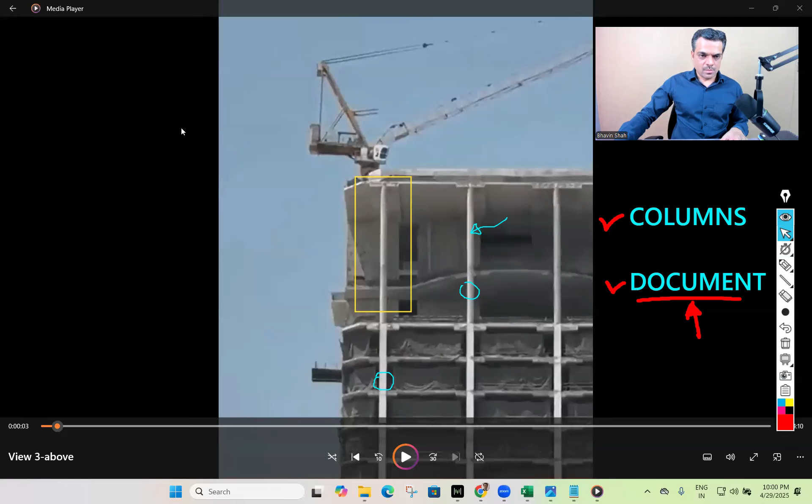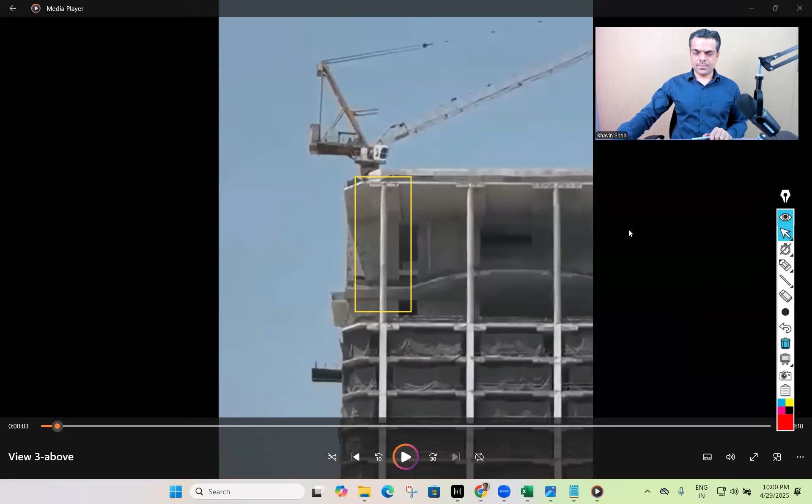As some gentleman was saying, buildings closer to the epicenter did not collapse, however those farther away showed structural damage. What I want to share is something we often forget as structural and design engineers.

It's the orientation of the building relative to the epicenter, and from which side the seismic wave is coming. Suppose we have a 100-story building with a rectangular shape. In tall buildings, you don't have much lateral dimension; that's why it's called a tall building.

If seismic forces come from the shorter lateral side of the building, that would be more destructive. If they come from the longer direction of the building, the stiffness in that direction helps resist it more.

Other gentlemen are also saying the flat slab and beam-column joints failed. That's because, if you look at the analysis, stiffness has a very critical relation to the force applied on the building.

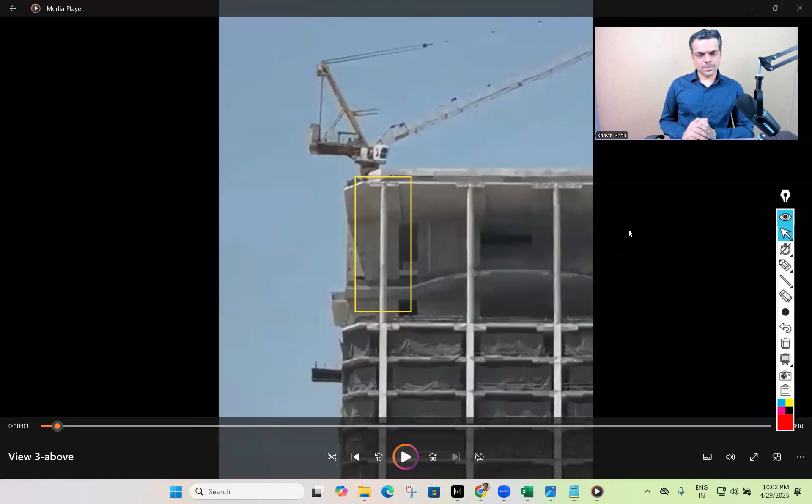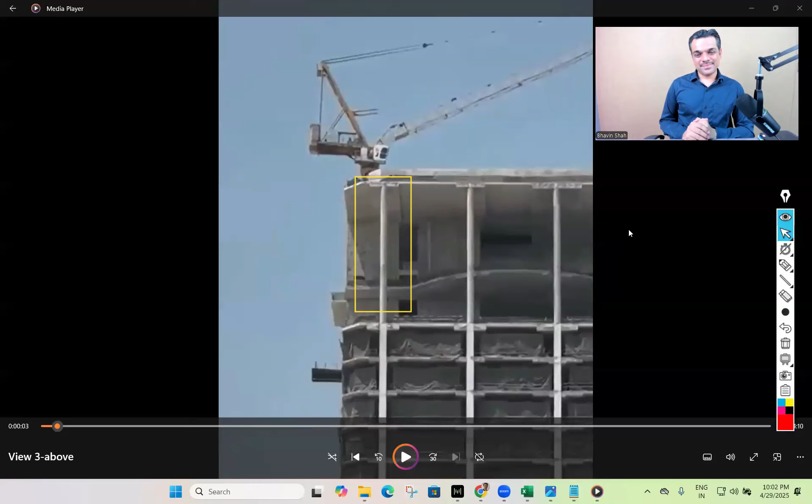Force is equal to k into x. So what I mean is, if the seismic epicenter is toward the shorter dimension of your building, that will be more destructive. If you have the long dimension facing the epicenter, you will have more stiffness to resist it.

I think that's one part we always forget while designing. This is just my input, just wanted to share it with the youngsters asking questions. Thank you very much. Most welcome, and thank you for sharing your input.